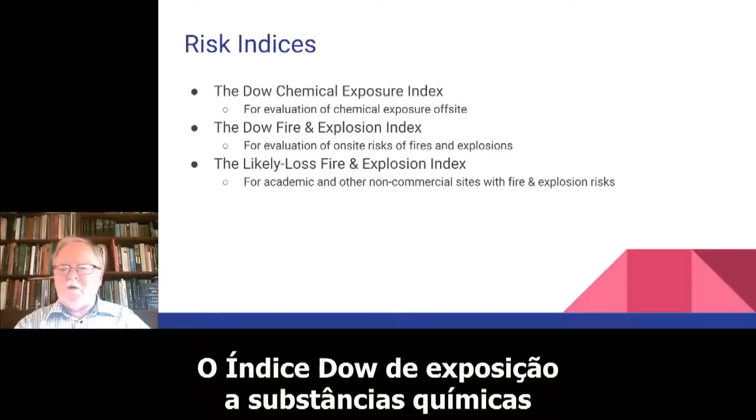The three risk indices this talk is concerned with are the Dow Chemical Exposure Index for evaluation of chemical exposure off-site, the Dow Fire and Explosion Index for evaluation of on-site risks of explosions and fires, and the ability of such events to impact delivery of products. And finally, the Likely Loss Fire and Explosion Index for situations where business interruption losses don't make sense.

What are the major off-site risks in the process industry? They are, in my view, exposure to toxic chemicals and exposure to pressure waves from explosions. This talk focuses on exposure to toxic chemicals. For exposure to chemicals, I recommend you evaluate at least two scenarios.

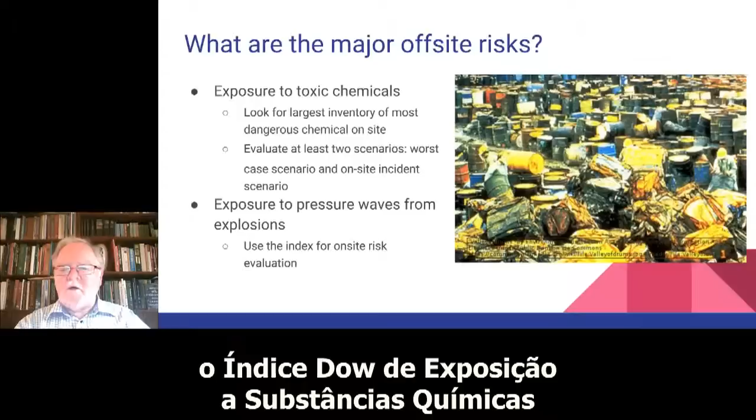A worst-case scenario involving the largest on-site inventory of your most dangerous chemical, and a scenario featuring an event that is likely to occur on-site during normal operations or maintenance or other abnormal situation within a 5-year period. It is for the latter scenarios that the Dow Chemical Exposure Index, in my view, is an excellent tool. So let's take a closer look at that tool.

The Dow Chemical Exposure Index was developed by the Dow Chemical Company in the mid-80s as a response to the release of methyl isocyanate in Bhopal, India. It was to be used by plant engineers to estimate the possible consequences of releases from their unit, plant or site. The Chemical Exposure Index will give you a simple method to rate the relative acute health hazards to people in neighboring plants and communities from possible chemical releases from your plant.

The Chemical Exposure Index is used when you conduct an initial process hazard analysis. In this connection, it serves as a screening tool for hazards requiring further study, such as a quantitative risk assessment. It is also a good tool for emergency response planning, where you are faced with questions such as shelter in place or evacuate, and how many to evacuate.

To use this tool, you need the Dow Chemical Exposure Index Guide, which fortunately is available for free from the S2S website at www.safety-s2s.eu. You can also buy the guide online from Amazon and others.

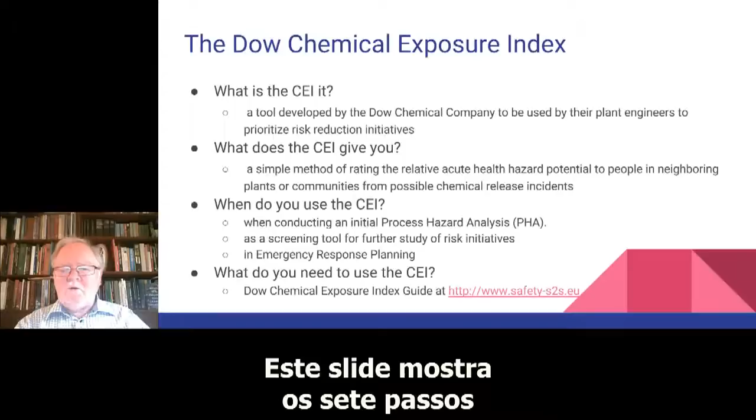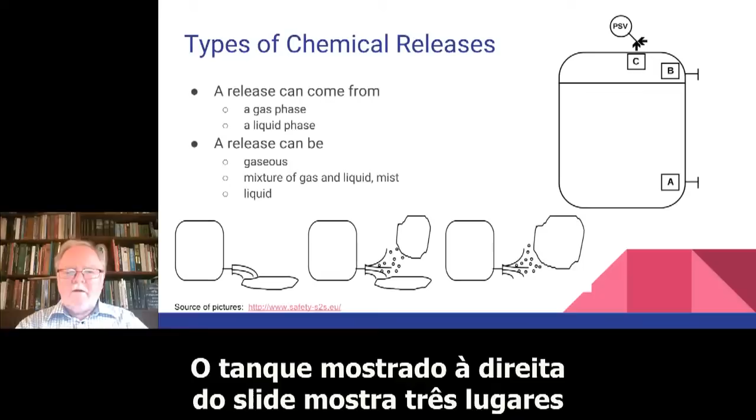The tank shown on the right of this slide shows 3 places where the content can be released without the tank bursting. From the nozzle at A, we can have a liquid release. From the nozzle at B, which is above the liquid level in the tank, we can have a gas release, and also from the safety valve at C, we can have a gas release.

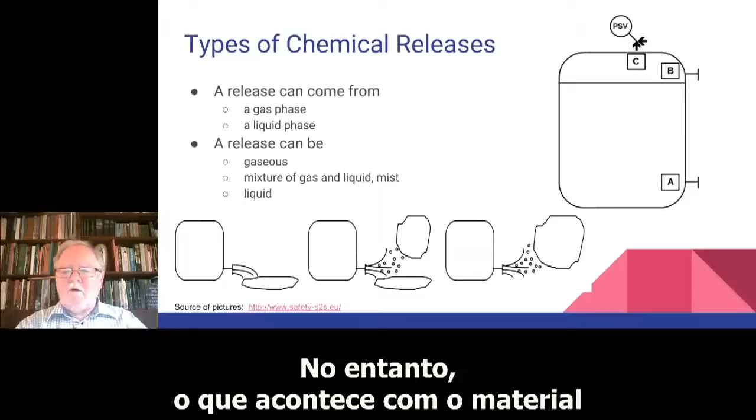However, what happens to the material after it leaves the nozzle, especially at A, depends on the properties of the material being released and the conditions inside the tank and outside. Hence, the result can be a vapor cloud and a lake, or just a lake, as indicated in the figure at the bottom of this slide.

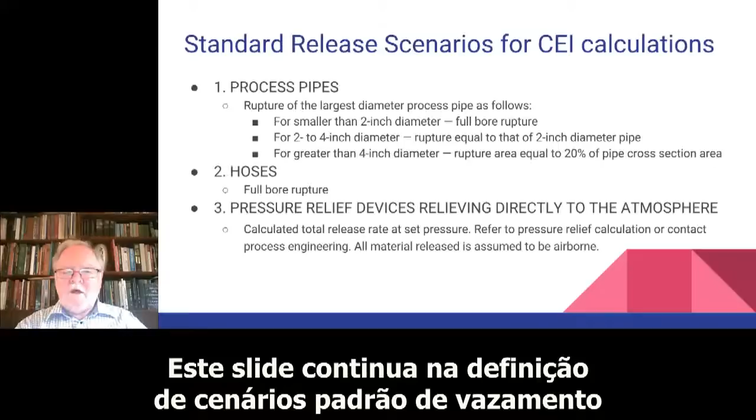Industrial hygienists have defined 3 different levels of harm from exposure to a toxic chemical. These definitions are shown on this slide.

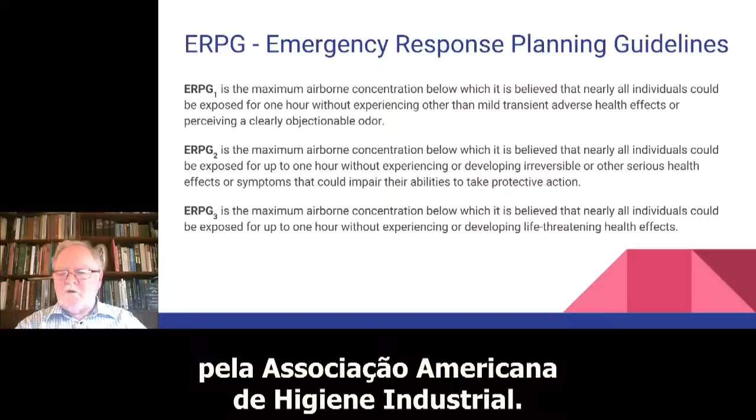The concentrations are called Emergency Response Planning Guideline levels, or ERPG levels, and they are all related to a 1-hour exposure. ERPG values are published by the American Industrial Hygiene Association. The concentration and severity of harm increases from ERPG 1 over ERPG 2 to ERPG 3.

If no ERPG values are available, then estimated emergency planning guideline levels, or EEPG levels, are used. On the next slide, we'll see how these are estimated.

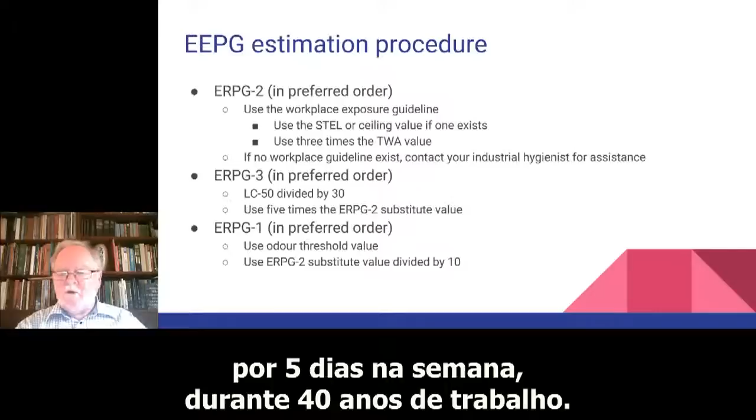To start an estimation of EEPGs, you need as a minimum a TWA, or time weighted average, for exposure of a worker over 8-hour work days for 5-day work weeks for 40 years of employment. If no such limit is available, then your industrial hygienist may be able to help you find a similar compound for which a TWA exists.

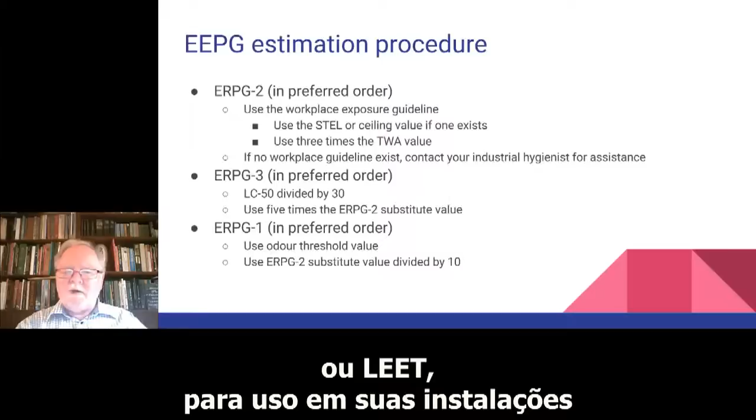The U.S. Department of Energy have also published what is called Temporary Emergency Exposure Limits, or TEELs, for use at their facilities when ERPGs are unavailable.

The calculation of the amount of airborne material from a gaseous release is very simple, and some of you may recognize the form of the equation from your chemical engineering textbooks.

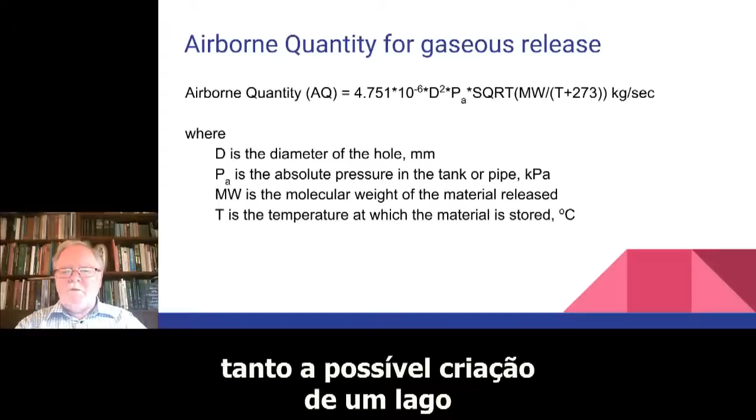A release is assumed to last at least 900 seconds. If the tank runs empty before that time, then the release rate is the content of the tank divided by 900.

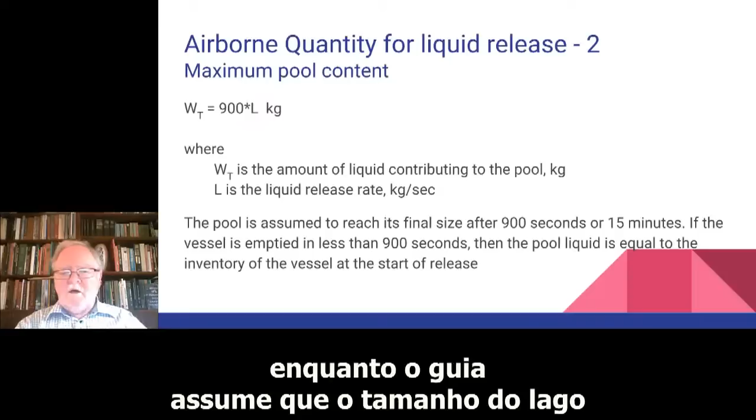Next, the maximum amount of possible pool content in a lake is simply the liquid release rate times 900 seconds, as the guide assumes the size of the lake has been stabilized after about 900 seconds, or a quarter of an hour.

...then a value of 0.0044 for the ratio may be used for many hydrocarbons. If the fraction flashed is greater than or equal to 0.2, then no lake is formed.

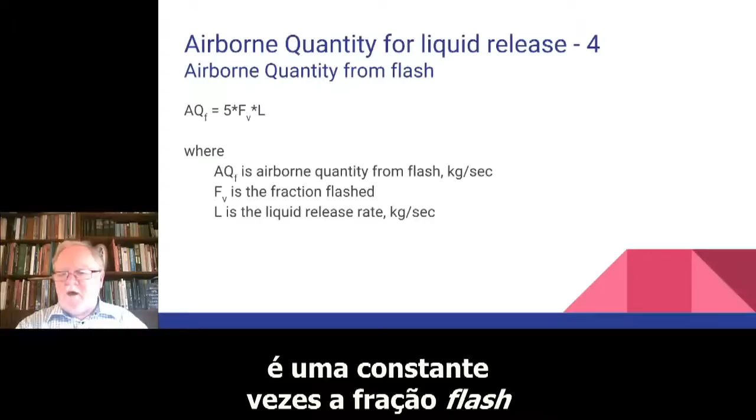The amount airborne from the flash is a constant times the fraction flashed times the liquid release rate.

The goal is to calculate the amount evaporated from the lake formed. To do that, we need to know the amount of material in the lake, i.e. what was released minus what was initially flashed, and the surface area of the lake, i.e. the interface to the air.

In the latter calculation, we assume the depth of the lake to be 0.01 meter, or 1 centimeter. Naturally, if the lake is formed in a diked area, then the dike limits the surface area and the depth could be much more than 1 centimeter.

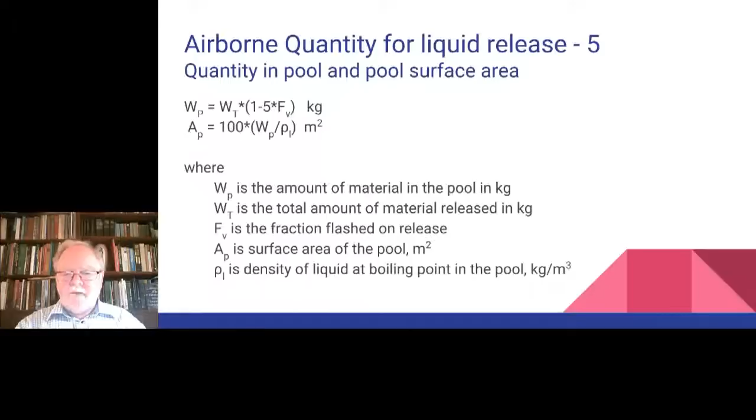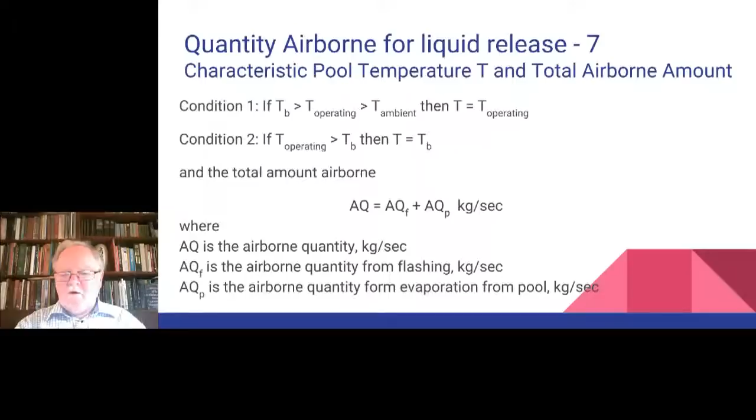This calculation is done, calculating the total amount airborne as the sum of the amount flashed and the amount evaporated, subject to the constraint that it cannot exceed the liquid release rate calculated in the initial step.

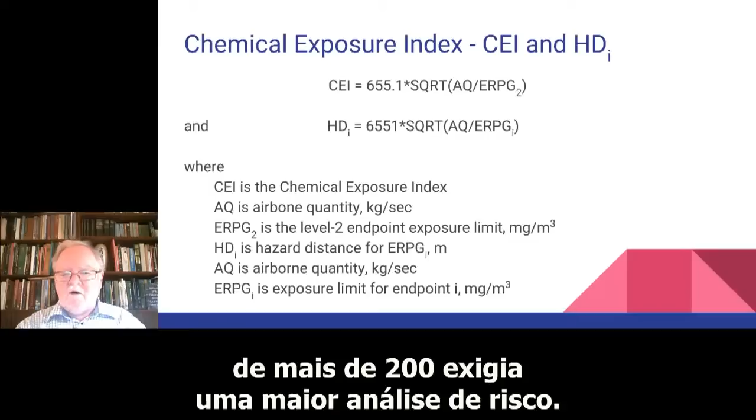At a workshop at Dow Chemical in Freeport some years ago, it was mentioned that a CEI chemical exposure index of more than 200 required further risk analysis.

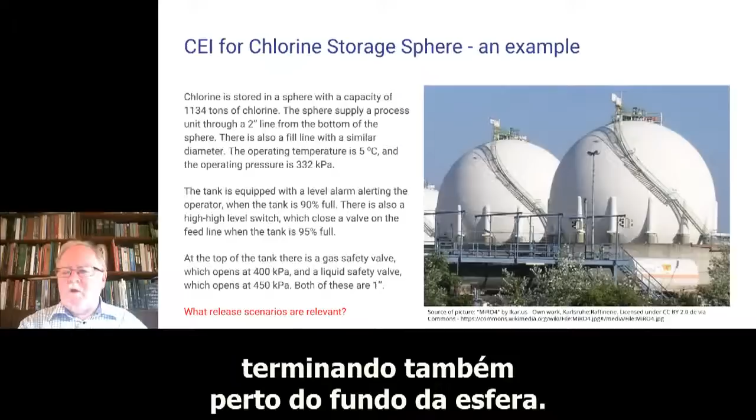Let us now consider an example. Let us consider a chlorine sphere with a capacity of 1134 tons of chlorine and a 2-inch process supply line from the bottom of the sphere, and a fill line with a similar diameter also terminating close to the bottom of the sphere. The sphere is operated at 5 degrees centigrade and a pressure of 332 kilopascal.

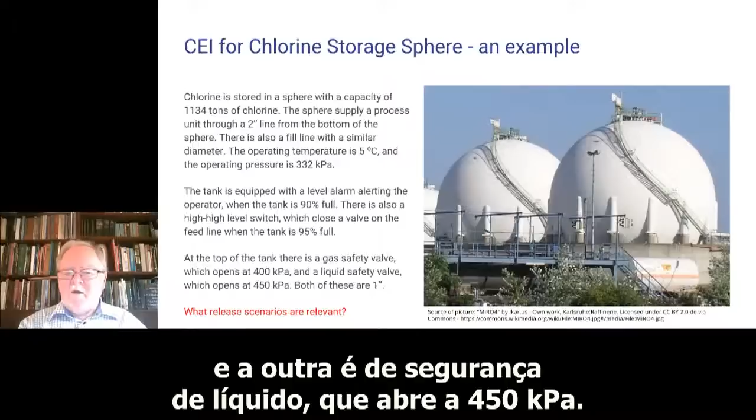The sphere is also equipped with a level alarm which alerts about the sphere being 90% full. Finally, on the top of the sphere there are 2 safety valves, both with a 1-inch opening. One is a gas safety valve which opens at 400 kilopascal, and the other is a liquid safety valve which opens at 450 kilopascal.

If the 2-inch nozzle on either the process supply line to the consuming process or the fill line fails, then we are faced with a liquid chlorine release resulting in a pool and a chlorine vapor cloud.

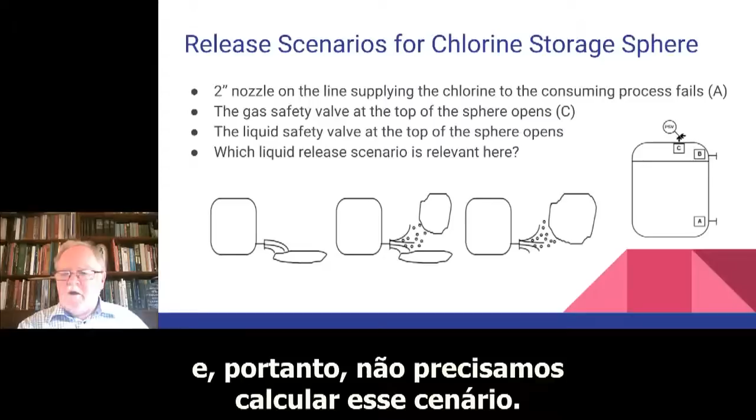If the liquid safety valve opens, the release rate will be smaller than that of either of the 2-inch nozzles, and hence we don't need to calculate that scenario. Although the release rate from the gas safety valve, based on experience, also will be smaller, we will calculate this in order to confirm our assumption.

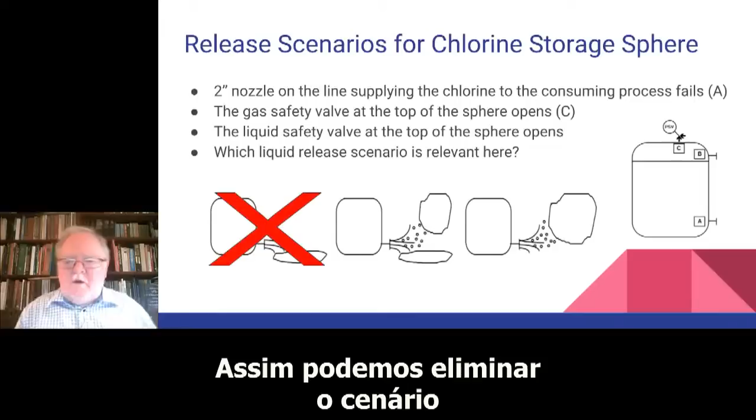We can already at this point eliminate the scenario where no vapor cloud is formed, based on the properties of chlorine.

The liquid chlorine release rate is calculated to be 60 kilograms per second, and the total amount released in 900 seconds is about 54 tons, which is significantly smaller than the capacity of the sphere. Hence, we confirm that the assumption built into the equation of liquid release rate, that the level in the tank is almost constant during the release, holds in this case.

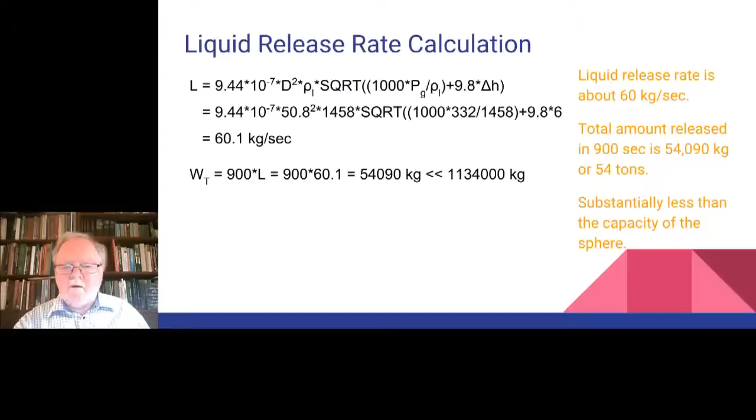Since the chlorine is boiling at minus 34 degrees centigrade and the temperature in the tank is plus 5 degrees centigrade, then the heat of evaporation should be calculated at a temperature of minus 15 degrees centigrade.

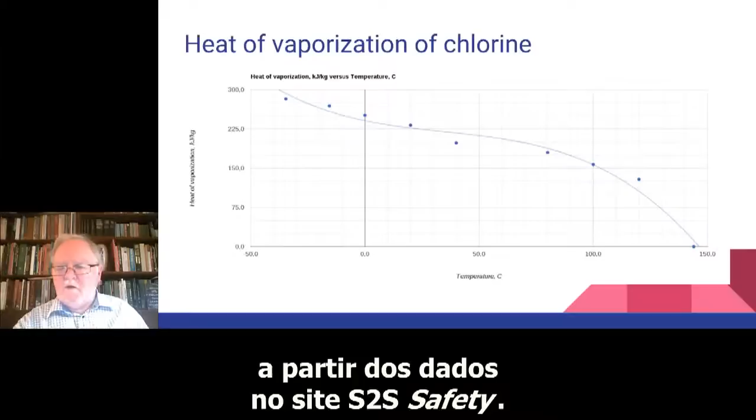We actually have two sources of information for heat of evaporation: one is the S2S safety website and another is the Riscos website. The curve shown here is created from the S2S website data. The two sources give identical results, so we use the value from the S2S website.

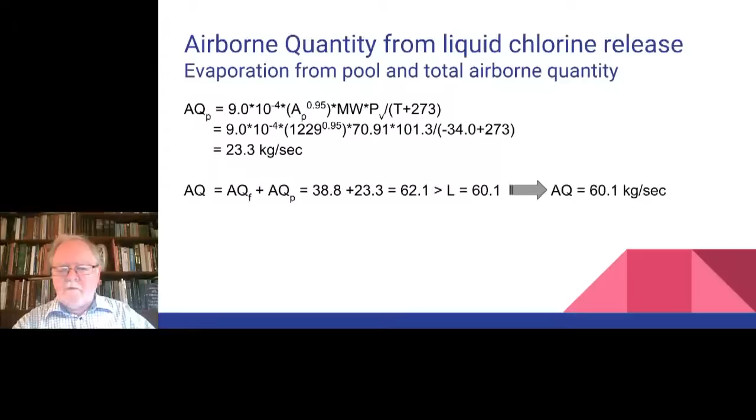The equation gives a chemical exposure index value exceeding the reliability range of the equations, which the creators of the index limit to values of 1000 for CEI, or chemical exposure index.

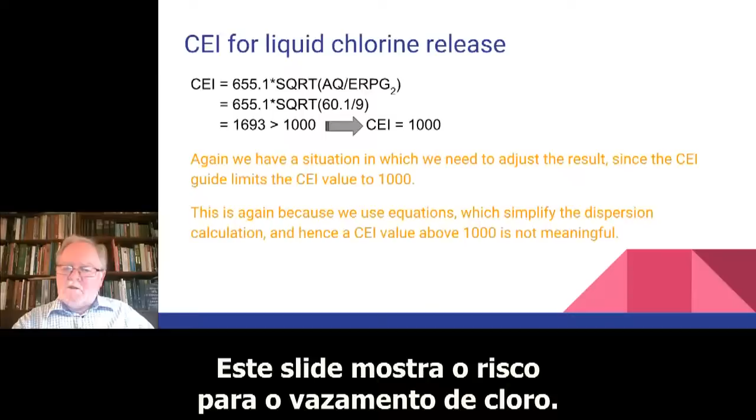Based on these hazard distances, one could attempt to evacuate everyone within 6.5 kilometers of the release and ask people up to 10 kilometers away from the release to shelter in place. The ERPG values used in these calculations are respectively 3, 9, and 58 milligrams per cubic meter.

Here are some suggestions for mitigating off-site risks. Distance is the absolute best, but we cannot think about prohibiting people from living within 6.5 kilometers of a facility.

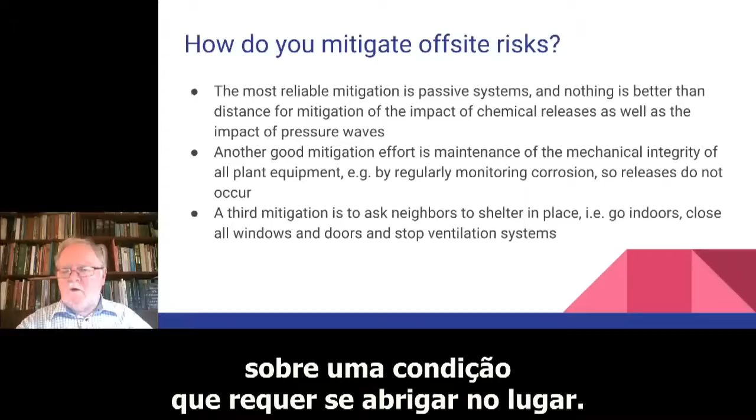More realistic would be to attempt to maintain the facility so releases are less likely, and if they do happen, then have alerts triggered in people's homes about a condition requiring sheltering in place.

The question is, if a scenario such as the one used in this example is realistic. Unfortunately, the answer is yes.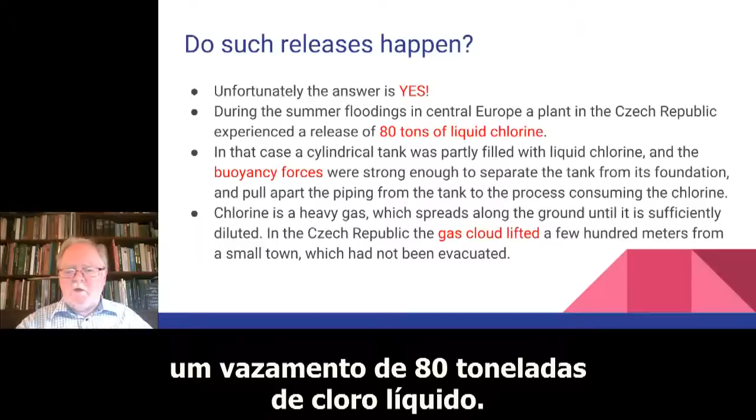During the summer floods in Central Europe some years ago, a plant in the Czech Republic experienced a release of 80 tons of liquid chlorine. In that case, a cylindrical tank was partly filled with liquid chlorine, and the buoyancy forces were strong enough to separate the tank from its foundation and pull apart the piping from the tank to the process consuming the chlorine.

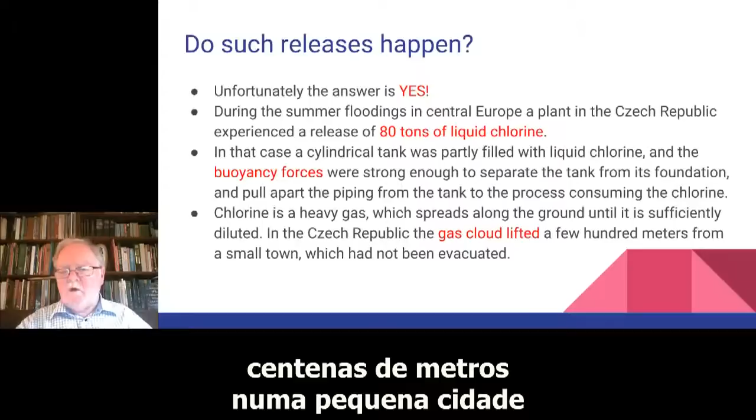Chlorine is a heavy gas which spreads along the ground until it is sufficiently diluted. In the Czech Republic, the gas cloud lifted a few hundred meters from a small town which had not been evacuated.

This slide summarizes the calculations for gaseous chlorine release. We immediately notice this chemical exposure index and hazard distances are much smaller, although not insignificant.

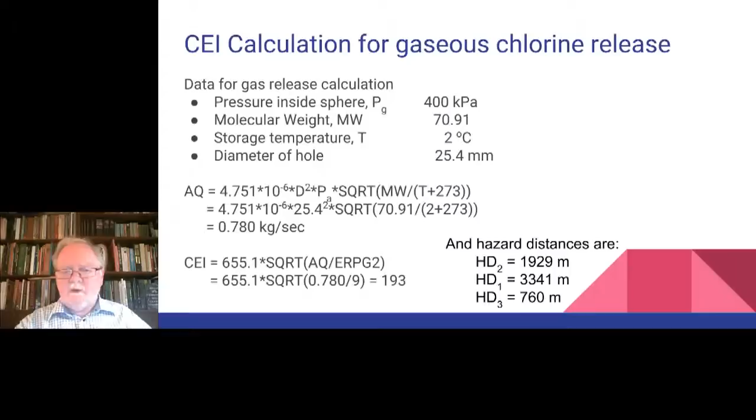Finally, here's a summary of the CEI calculations for chlorine releases. The calculation clearly shows that liquid chlorine releases are much more hazardous than a gas release. The liquid release considered here is rather large.

Often liquid release starts with a very small release from a flange or a connection. Such liquid releases are easy to spot in humid areas of the world, since the evaporating chlorine cools the air and creates a buildup of ice around the leakage. This buildup is easy to spot and take action on, much easier than an equally small gas release.

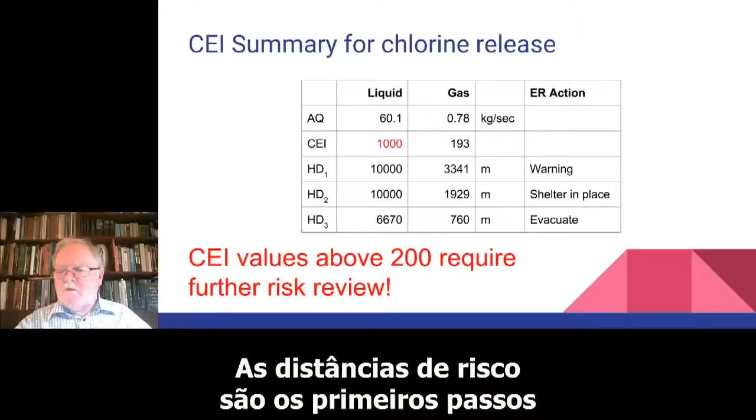However, since you do not know whether you will have a liquid or gaseous release of chlorine, your emergency response plans must consider both possibilities. The hazard distance gives first steps in an emergency response plan for these scenarios. Next step is to consider possible actions to take to prevent either release from occurring.

This ends the coverage of the Chemical Exposure Index for off-site assessment of chemical releases.

Let us next turn to major on-site hazards. A hazardous event usually starts with the release of a toxic or flammable material. The Chemical Exposure Index, which we have just talked about, deals with the toxic effects. Other possible consequences are explosions, which are often followed by fires.

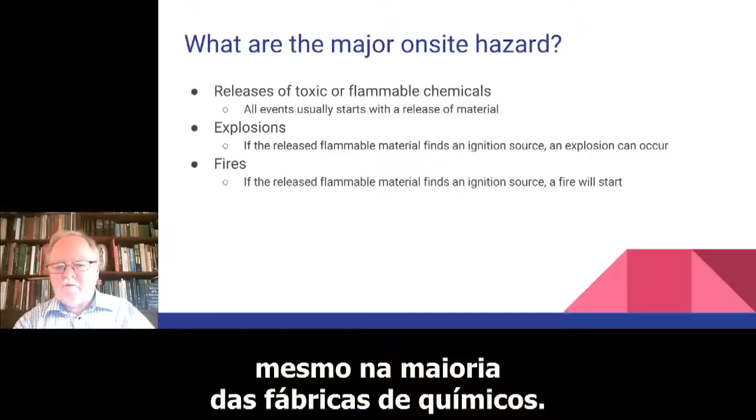As you know, ignition sources are something you don't have to pay for in most chemical plants. A tool to perform analysis of the impact of explosion and fires is the index which we will now turn to.

It is called the Dow Fire and Explosion Index. The Dow Fire and Explosion Index in its first form dates back to the early 60s. About the same time, ICI developed the idea of hazard and operability studies. The Fire and Explosion Index is a tool developed by the Dow Chemical Company to be used by plant engineers to assess the potential for loss caused by explosions and fires, quantify the expected damage, and identify equipment that could contribute to escalation of an event.

The Fire and Explosion Index gives a simple method for rating the hazard potential of a process unit, a plant, or a site. A tool to quantify the loss potential, and not least, a method to communicate the potential risk to management in order to secure investment in loss reduction measures.

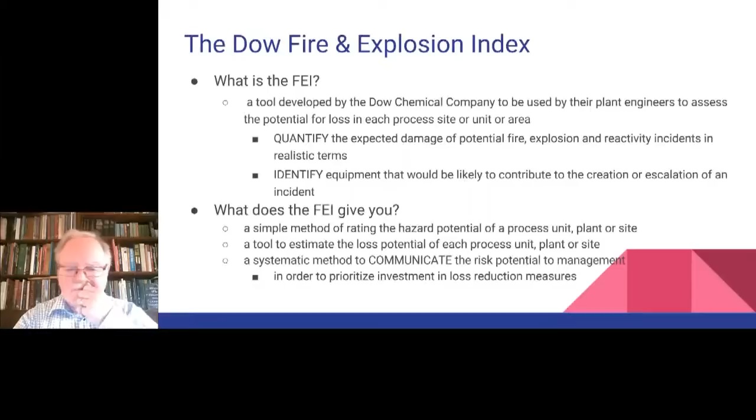You should use the Fire and Explosion Index during the initial process hazard analysis as a screening tool for further studies of risk reduction initiatives and in emergency response planning.

All you need to get started is the Dow Fire and Explosion Index Guide, which you can download from the S2S website at www.safety-s2s.eu or buy from an online bookstore like Amazon.

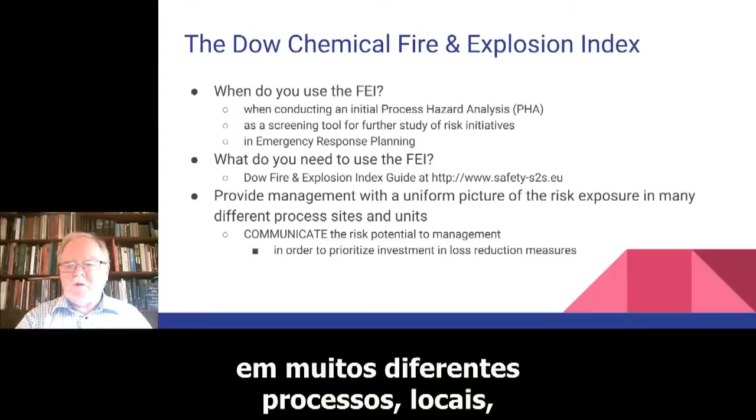The Fire and Explosion Index provides management with a uniform picture of the risk exposure in many different processes, sites, plants, and units, and hence facilitates the prioritization of investment in loss reduction measures.

The application of the Fire and Explosion Index is a 7-step procedure for each unit, plant, or site involved. Selection of pertinent process units is the first step.

Determination of material factor for each unit or plant is the second step. Third is calculation of the general process hazard factor, which I also call the design hazard factor. Fourth, the calculation of the special process hazard factor, which I call the operations hazard factor.

And fifth, determination of the process unit hazard factor and calculation of the fire and explosion index as a measure of the hazard level of the unit or plant or site.

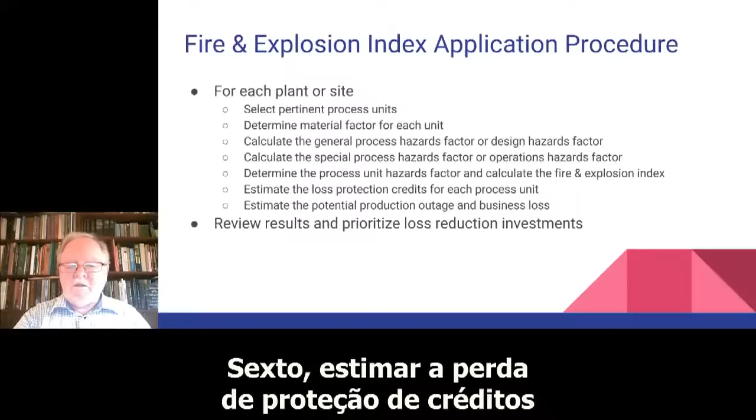Finally, 6, estimate the loss protection credit for each unit or process or plant. And 7, estimate the potential production outage and business loss. And finally, review and prioritize loss reduction investment based on the results.

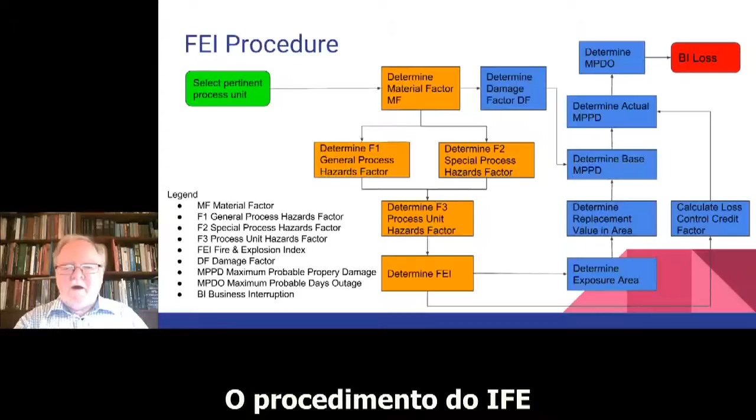This slide is an overview of the fire and explosion index calculation procedure. The procedure can be divided into 2 parts. The first part, shown here in orange, is concerned with the hazard level in the process unit, plant, or site. The second part, shown here in blue, is concerned with the potential risk to the business in terms such as production losses and financial losses.

A so-called pertinent process unit is a unit in which the material has a high material factor, or a high quantity of materials is involved, or expensive equipment is involved, or extreme operating conditions are involved, or past history of incidents is available, or is critical to the site's operation.

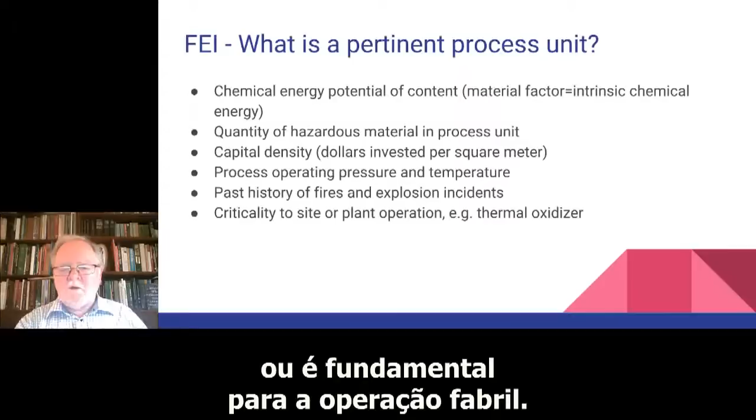An example of the latter is the thermal oxidizer. You might want to involve your operators in the selection of pertinent process units.

After a process unit is selected, we need to determine the material factor, which is a measure of the energy potential of the material processed in the unit. The material factor is based on flammability and reactivity ratings, which can be found in the Fire and Explosion Index Guide or in publications from the National Fire Protection Association, NFPA.

Reactivity can also be estimated from laboratory measurements by measuring the decomposition exotherms as shown here.

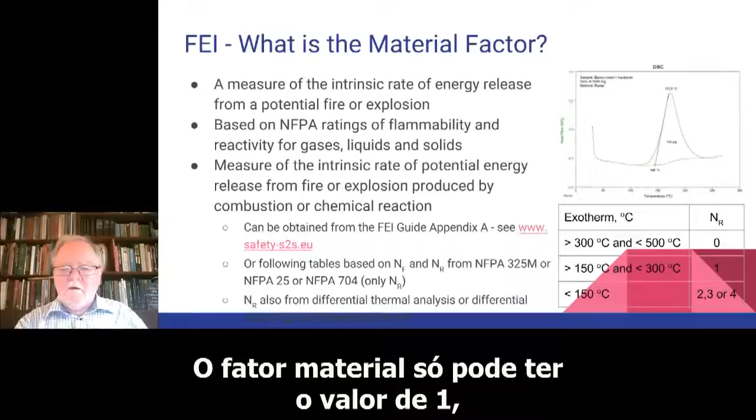The material factor can only have values of 1, 4, 10, 14, 16, 21, 24, 29, or 40. This table shows how it is determined from the flammability rating NF and the reactivity rating NR for liquids and gases.

For example, methanol, which has a flammability rating of 3 and a reactivity rating of 0, has a material factor of 16, i.e. moderate.

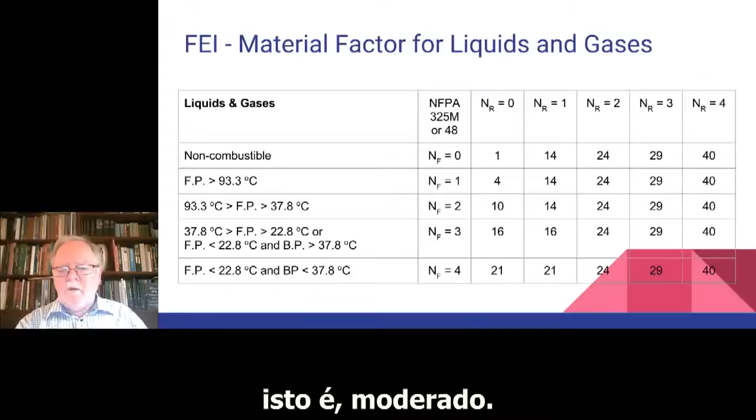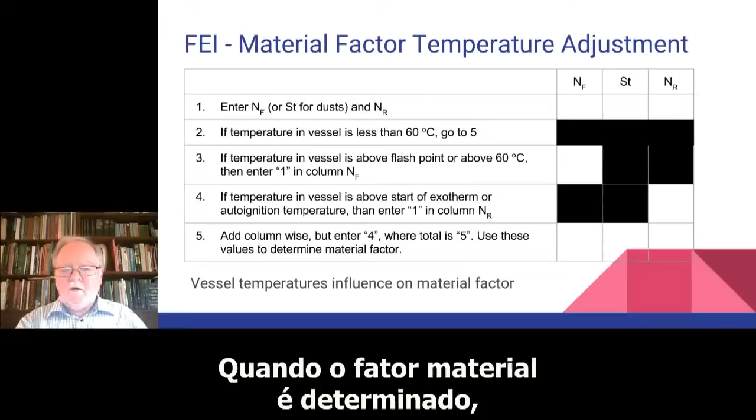Once the material factor has been determined, we can turn our attention to the general process hazard factor. The base factor is 1, and then penalties are added for the following design conditions: exothermic chemical reaction, endothermic chemical reaction, material handling and transfer, enclosed or indoor process unit, access to process area, drainage and spill control.

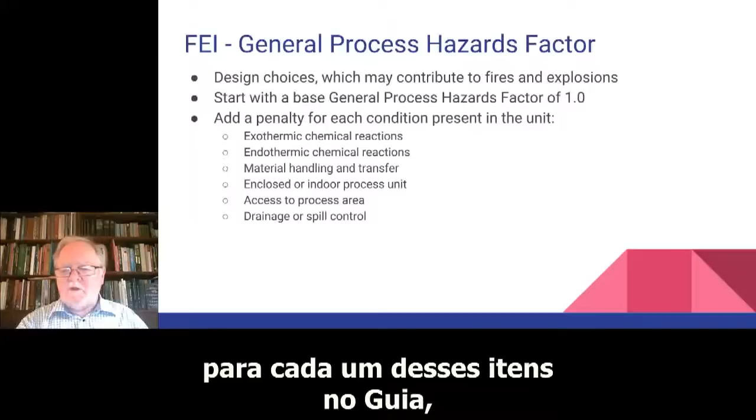You need to read the detailed explanations for each of these items in the guide before attempting to assign penalties. Read the guide not just one time, but at least twice. And for your first attempt to assign penalties, discuss your suggested penalties with a colleague.

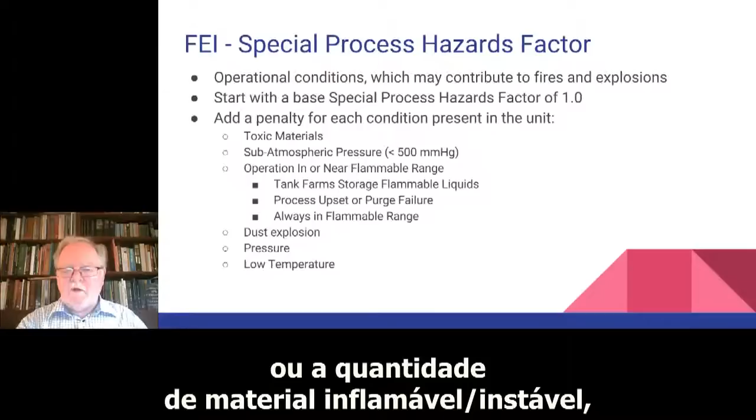The special process hazards factor also starts with a base factor of 1, and penalties are added for the following operating conditions: toxic material, subatmospheric pressure, operation in or near flammable range, dust explosion, pressure, low temperature, or quantity of flammable and unstable material, corrosion or erosion, leakage at joints and packings, use of fired equipment, hot oil exchange systems,

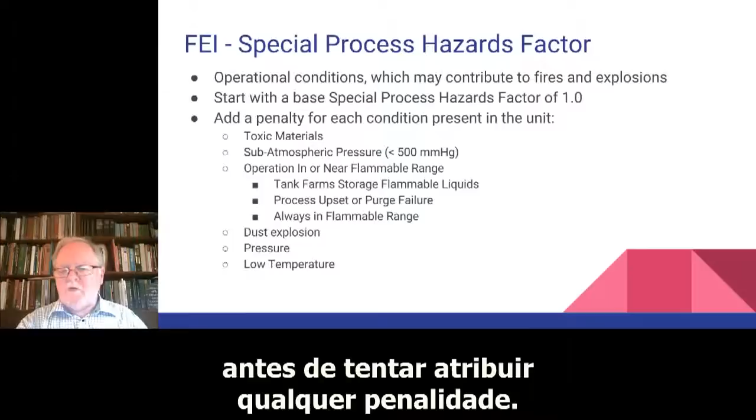and rotating equipment. Again, read the detailed explanations of each item in the guide before you try to assign penalties to any one thing. It is my experience that students, when first introduced to the Fire Explosion Index, assign too high penalties or miss that certain penalties exclude others.

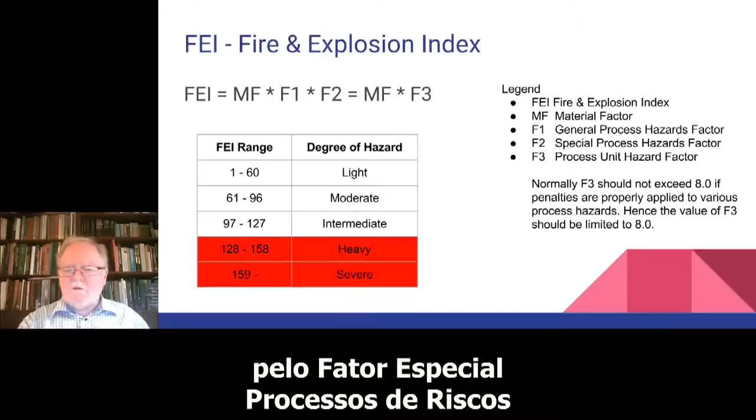The Fire Explosion Index is simply the multiplication of the material factor by the general process hazards factor and by the special process hazards factor. If penalties are reasonably assigned, then the product of the two hazards factors should not exceed 8. It is strongly recommended to apply this limit in the calculations of your Fire and Explosion Index.

The tables show the relation between the Fire and Explosion Index and the level or degree of hazard using the scale light, moderate, intermediate, heavy, and severe. Fire and Explosion Index values above 128 require further risk assessment, for example, a quantitative risk assessment.

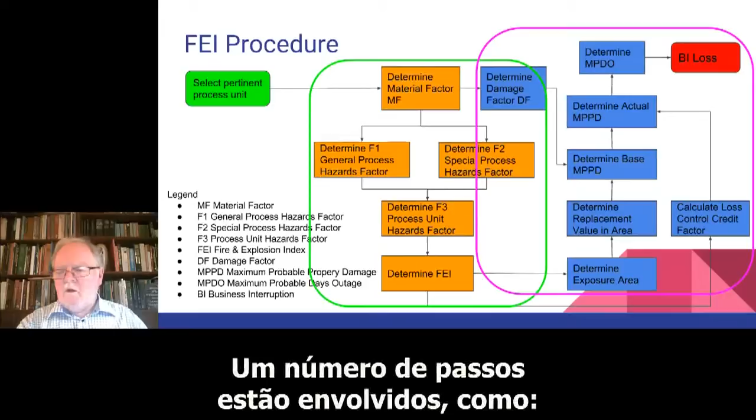We have now performed the hazard assessment shown here with the green line around it. We now turn to the risk assessment shown here with the purple line around it. A number of steps are involved, such as exposure area determination, value of equipment in exposure area, damage factor estimation, base maximum probable property damage, loss control credit calculation, actual maximum probable property damage, maximum probable days outage, and business interruption loss.

The following slides briefly look at each of these. The base maximum probable property damage is the damage estimate which doesn't consider any loss control measures taken at the site or plant. The value of the equipment is the original cost adjusted for inflation using the Chemical Engineering Plant Cost Index.

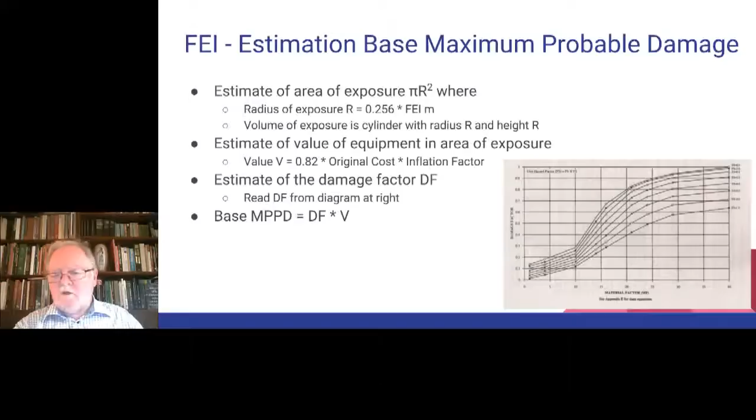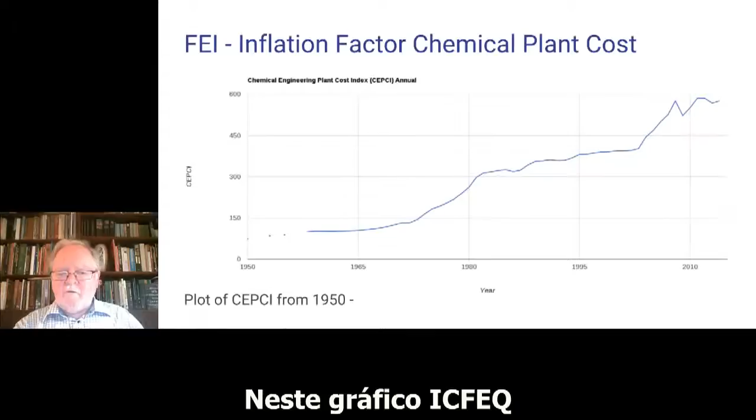A graph of the CEPCI is shown on the next slide. From this graph of the CEPCI, we see that during the financial crisis of recent years, the inflation was low.

The loss control credit factor is the product of credit factors relating to 3 areas: control, isolation, and protection. The following slides list the items to be considered in determining each credit factor. Again, consult the guide for details about how and what to take credit for. Notice that credit factors are multiplicative, while hazard factors, as we used earlier, are additive.

Items considered in the process control credit factor are emergency power, cooling, explosion control, emergency shutdown, computer control, inert gas, operating instructions and procedures, reactive chemicals review, other process hazards analysis.

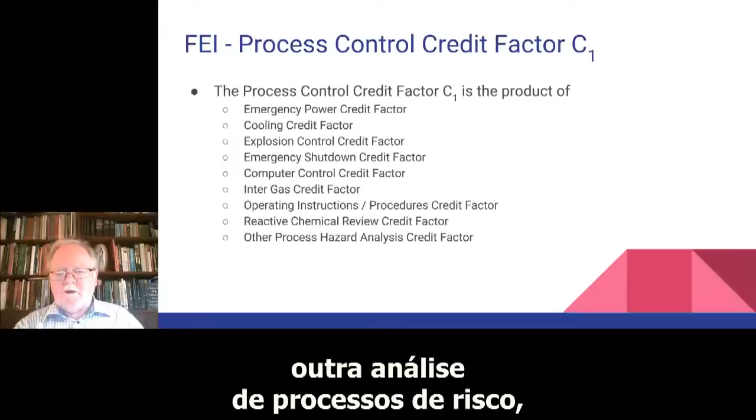Other process hazards analysis could be any of the following activities: quantitative risk assessment, detailed consequence analysis, fault tree analysis, hazard studies, failure mode and effect analysis, what-if studies, checklist evaluations, management of change review, but only one factor can be applied for other process hazard analysis.

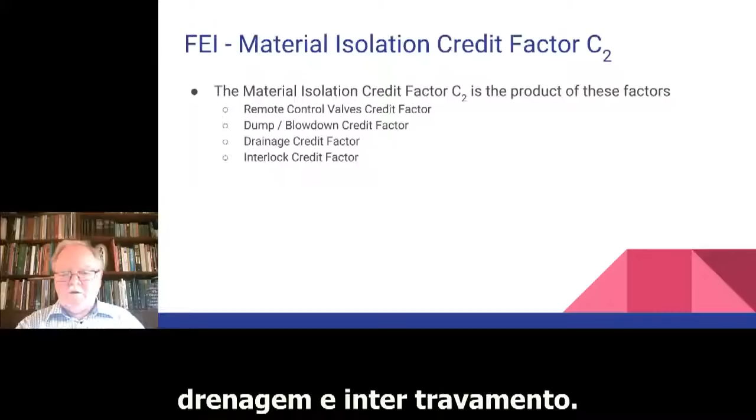Items considered in the material isolation credit factor are remote control valves, dump and blow down systems, drainage and interlock. Items considered in the protection credit factor are leak detection, structural steel protection, fire water supply, special systems, sprinkler systems, water curtains, foam, hand extinguishers and monitors, cable protection.

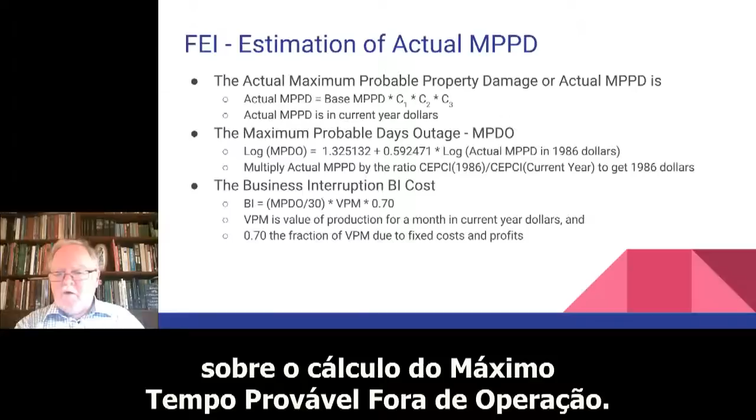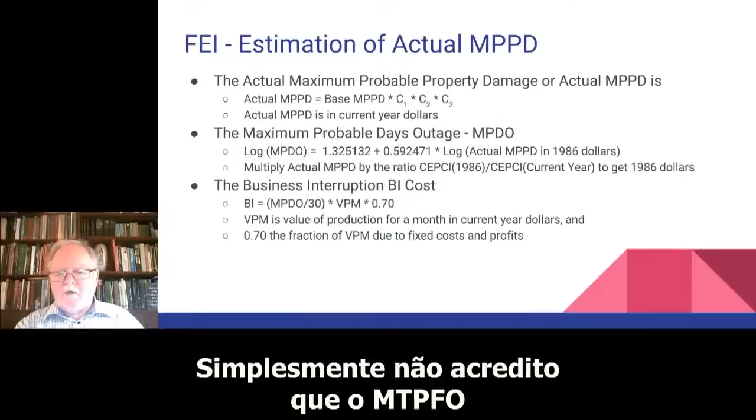Estimation of the actual maximum probable property damage and the business interruption losses are done on this slide. Notice that the guide is unclear about calculation of the maximum probable days outage. I suggest that the actual maximum probable property damage should be converted to 1986 dollars in order to use the equations from the guide to estimate the maximum probable days outage. I simply don't believe that the maximum probable days outage should increase with inflation.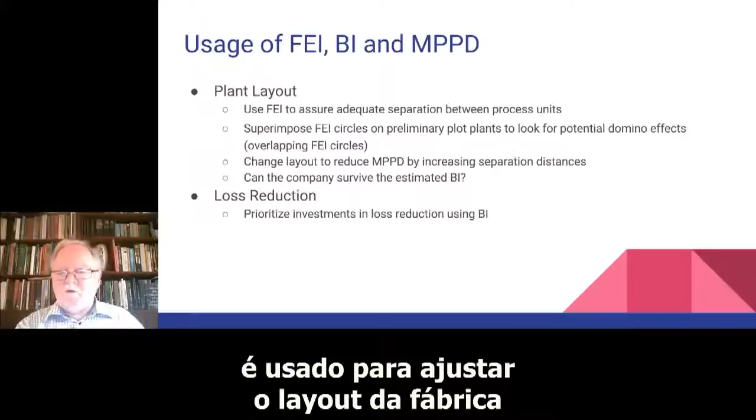Generally, fire and explosion index is used to adjust plant layout to have adequate separation between process units by drawing exposure circles on a preliminary plot plan. And naturally, business interruption losses are used to prioritize loss reduction investments.

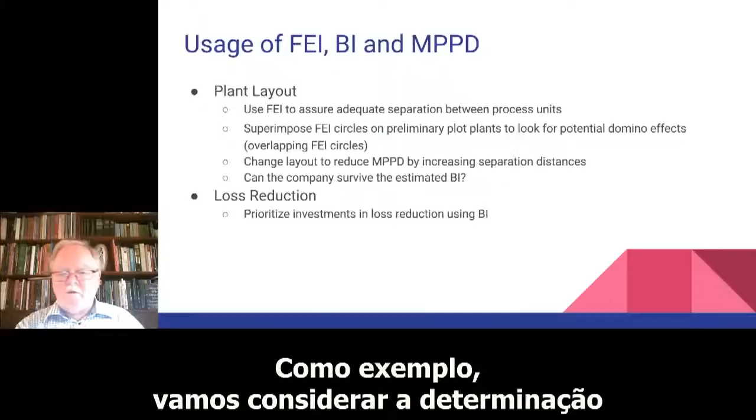As an example, we consider the determination of the fire and explosion index for a nitroaniline reactor. Such a reactor exploded on August 8, 1969 at a plant in the town of Sauget, about 6 kilometers south of St. Louis in Illinois, United States.

The primary cause of the event was that too much aniline had been added to the reactor and its safety valve did not work. The temperature indicator in the control room was frozen at 194 degrees centigrade, and the operator did not know that the temperature continued to increase. The pressure indicator was also maxed out.

The 3,350-gallon reactor was placed indoor with limited access. Normal operating temperature was 175 degrees centigrade, and the 2.5-inch thick reactor could easily withstand pressures up to 550 psig.

Hence, the determination of the design hazard factor for the nitroaniline reactor is shown here. This factor amounts to 3.1.

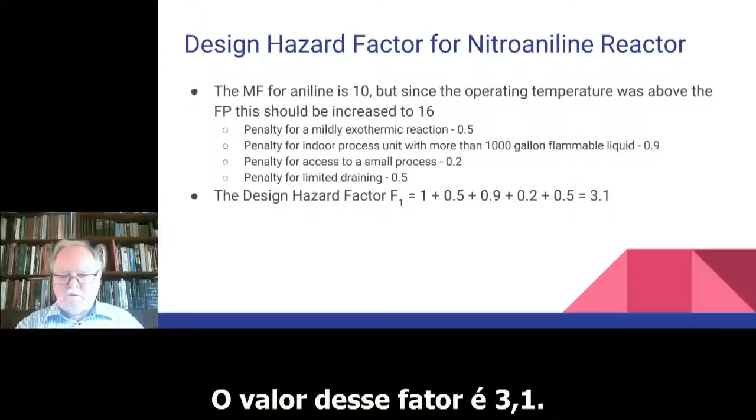And here the determination of the operation hazard factor for the aniline reactor is shown. This factor amounts to 3.5. The product of these exceeds 8, and hence the unit hazard factor is limited to 8. The result is a fire and explosion index of 128, which indicates a serious fire and explosion hazard.

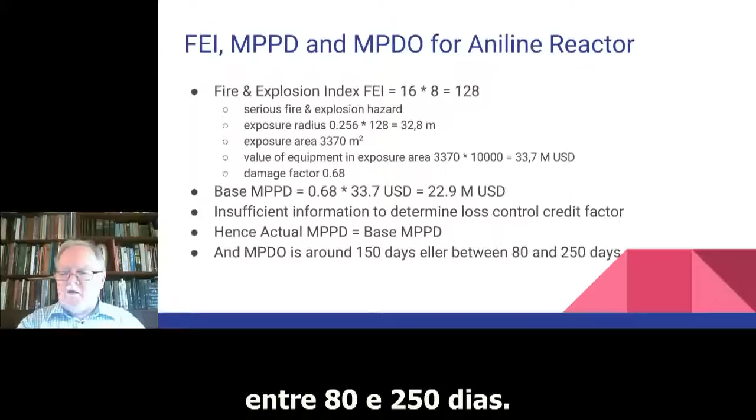The radius of exposure is approximately 33 meters. The base maximum probable property damage is $23 million, based on a damage factor of 0.68. Loss control credits could not be calculated, and this results in an estimated outage of between 80 and 250 days. Could your facility survive such an outage?

This concludes our coverage of the Fire and Explosion Index.

Finally, we will look at a likely loss fire and explosion index. There are situations in which items such as business interruption loss and maximum probable property damage, actual or base, don't make any sense. It is for these situations that the likely loss fire and explosion index has been created. It is to be applied where equipment damage and business interruption loss is not relevant, such as in pilot plants at universities and other research facilities.

The procedure from the Fire and Explosion Index is used in the hazard estimation step, i.e. the first part of the procedure, but an alternative approach is taken with the risk assessment.

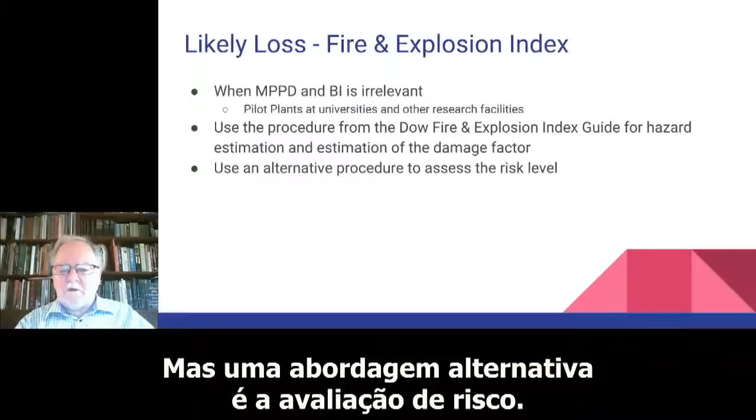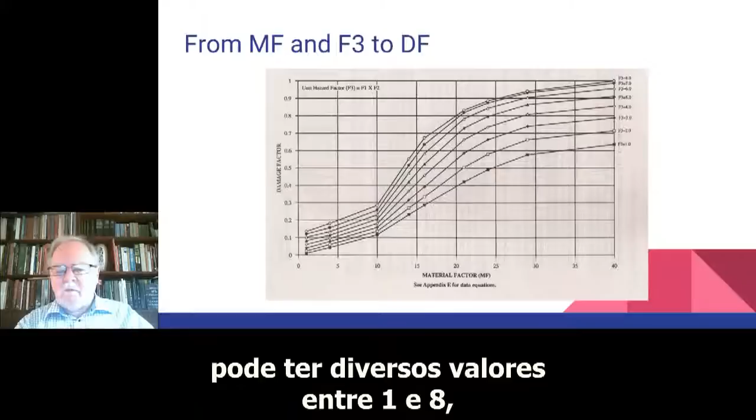This is a plot of damage factor versus material factor with unit hazard factor as a parameter, taken from the Dow guide. The material factor can only have the values of 1, 4, 10, 14, 16, 21, 24, 29, and 40. The unit process hazard factor, however, can have many values between 1 and 8, although it is not continuous.

So what results if we interchange the two parameters which the damage factor depends on? As you can see, the relation between damage factor and unit hazard factor is much more linear than the relation between damage factor and material factor. The lines for the different material factors are close to parallel.

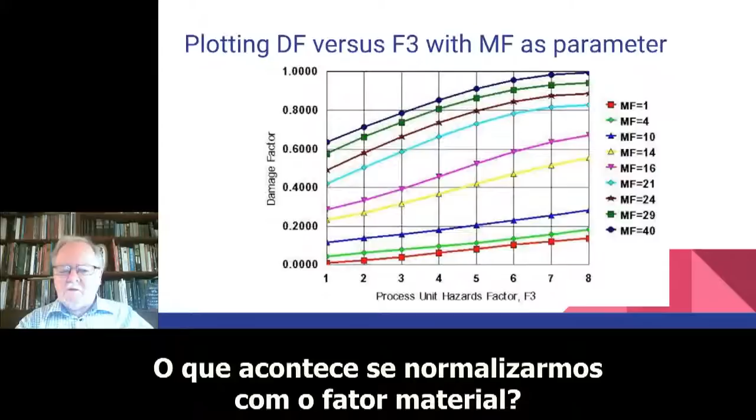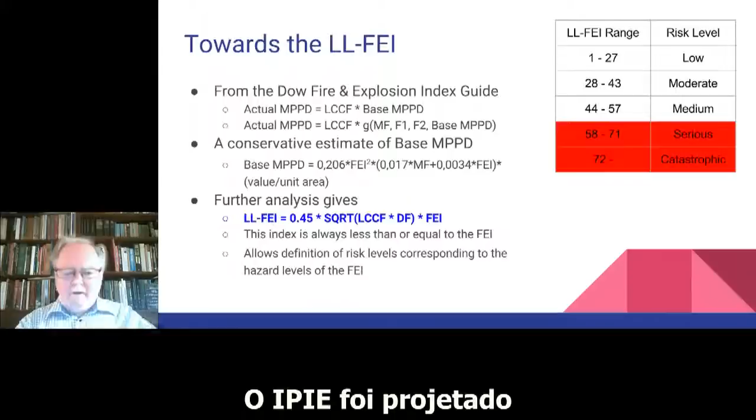The likely loss fire and explosion index has been designed to always be lower than the fire and explosion index. The risk levels corresponding to the hazard levels of the fire explosion index are indicated in the table on this slide.

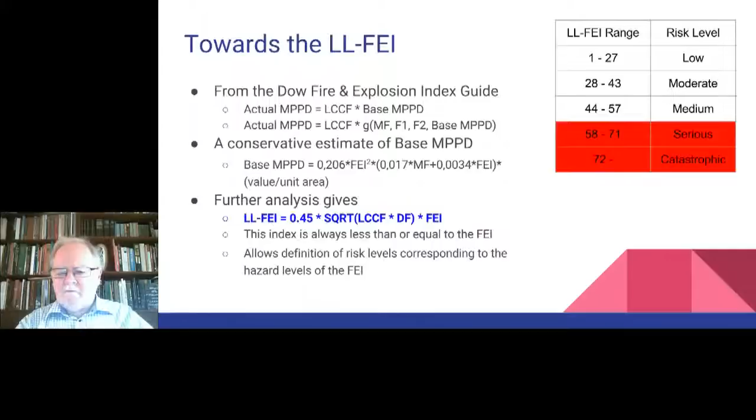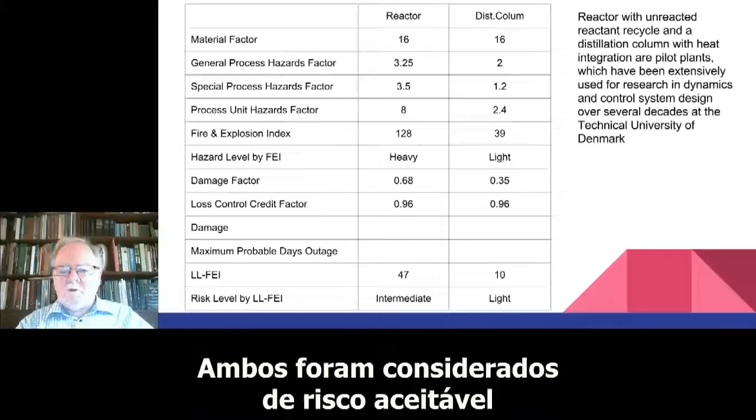Here the likely loss fire explosion index is applied to two pilot plants at the Department of Chemical Engineering at the Technical University of Denmark: the reactor with recirculation of unreacted material, and a distillation column with reuse of condenser heat in the reboiler. Both were judged to be acceptable risk in the academic environment before the likely loss fire and explosion index was developed. The likely loss fire and explosion index confirmed this judgment.

In this talk, you have been introduced to three indices which you can use in hazard and risk assessment for on-site and off-site events.

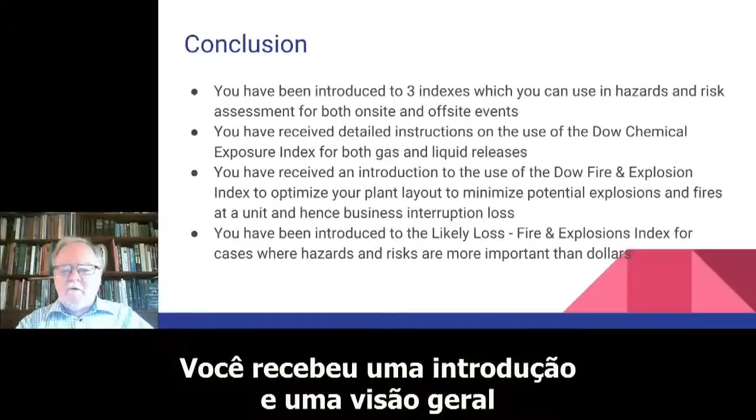You have received detailed instructions on the use of the Dow Chemical Exposure Index for both gas and liquid releases. You have received an introduction and overview of how to use the Dow Fire and Explosion Index to optimize your plant layout to reduce consequences of fires and explosions and to prioritize your investment in loss reduction.

You have been briefly introduced to the likely loss fire explosion index for cases where fire hazards and risk are more important than dollars.